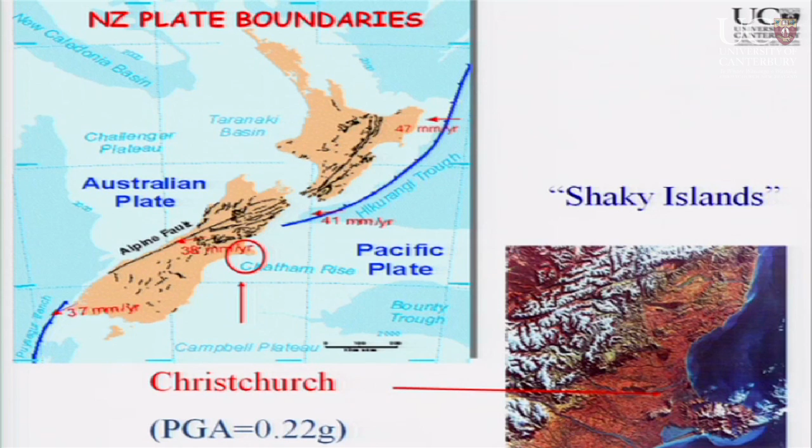Probably you were here, you didn't know it, but look at these scars - there are quite a few of them. And if you were able to see the number of earthquakes happening in New Zealand in the last few decades, you will see a lot of activity over here, quite a bit over there, and all the way around the Alpine fault and the scars around it, plenty of activity.

Unfortunately, this is something you now know by heart, and you'll almost be able to guess where the next fault is going to be, with probably equal probability of being lucky or unlucky as scientists. It's not true - but as you know, forecasting an earthquake is not predicting an earthquake. So being able to say there are unknown faults over here is actually the problem.

We do know that there are many unknown faults of the nature of the February ones. How many unknown faults are there, we don't know. And that's the problem. We should be able to design buildings in a way that, for how much we don't know, we can get through those unknown big ones - which is not only the Alpine fault - in a nice manner. You do know about September.

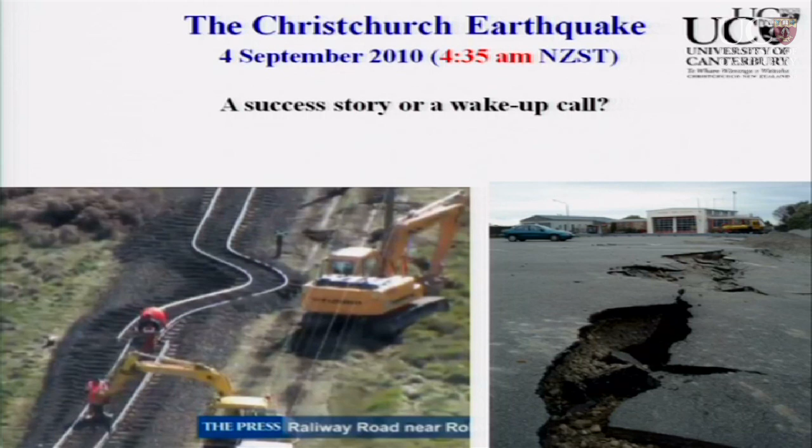You know that September was a lucky one, in a way, because it happened at 4:35 a.m. and not during lunchtime. September did not have the hundreds of victims it could have had. Because September happened, it did not cause the thousands of victims it could have, because it took down the potential - what we call the very well-known killers.

Unreinforced masonry buildings are well known to be potential killers, regardless, since quite a while - and we're going to discuss how long humankind has known that unreinforced masonry buildings are not the best possible buildings for seismic resistance. That's why they've been banned in New Zealand since 1935, after the 1931 earthquake in Napier.

So what we get out of this monstrosity, if you wish, is a humongous laboratory downtown - a very big laboratory that represents a big shaking table test, if you wish, with soil-structure interaction, soil conditions, liquefaction, full-scale testing, 3D, all degrees of freedom of motion. It's something unique.

That test cost quite a bit. They say $30 billion - it's not true, it's going to be more. You're going to hear that we are now writing a special issue with American friends and colleagues, and the special issue mentions $10 billion. I said...

How far away did people mention 10 billion? You know what the number is now - 30. Do you think that includes all indirect costs, business interruption, and your insurance? Has your insurance on your house gone down or up? Because mine has gone up, and my house, apart from some leaking and flooding in the roof, is quite okay.

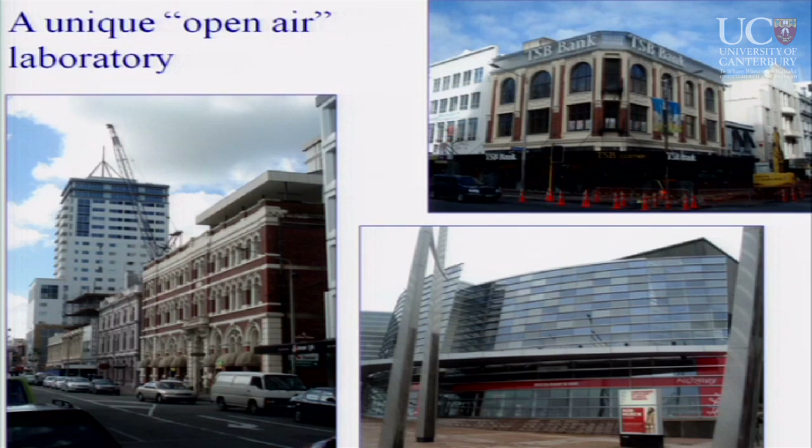Avoiding a facade to spall out, which is not a full collapse of a building, but is going to kill people, and unfortunately it did. Fixing that problem is not a major deal. We're going to see how that can be done, and how we can use new or old technology to

think about a better and safer city or nation. Now, the novelty, in a way the shocking surprise, was for the international community, not only nationally, to observe modern buildings, 1980s plus, quite recent buildings, damaged to an extent that they had to be retrofitted.

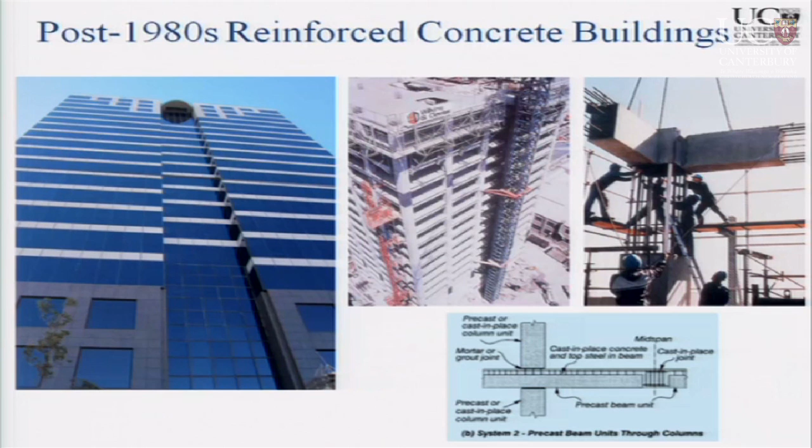You have not seen this one because it's not yet published, so now you can see it. This is PwC, there's no need to say more. PwC, after the earthquake, plenty of pictures like that. The ceilings are there, then we managed to enter the building when the ceilings were being taken off, so the whole building was completely naked. There was no carpet, no linings, only the windows at the far end.

You were in a building which, when it's empty, as you know, looks smaller. So you were able to see the whole thing and observe quite significant cracks here and there. The ceilings have been taken off, and you can see this level of damage.

We're going to discuss if that was good or bad, but the reaction is about how bad that damage was in terms of requirements to demolish the building. Actually, the building did very well. The problem is that it did very well because it was designed according to the standard way of doing things, which is that the building is going to preserve lives. It's not going to preserve itself from being damaged.

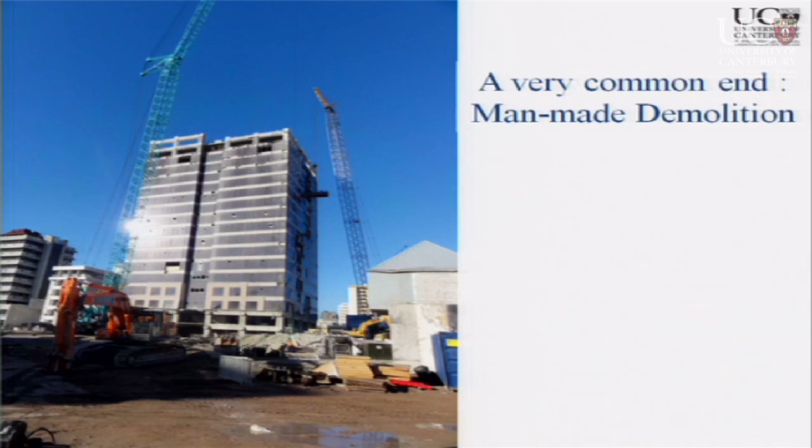When I showed it to the international community, they were thinking, really? We didn't know about that. I said, okay, look at that. This is not Dubai, okay? It scaringly looks like a desert area where some people are trying to build up a city.

I was trying to explain that the number of cranes in town were probably more, for a few months, than in a big new city coming up in a desert area. But instead of building up, they were taking down. In a while we're going to have a desert area where slowly things are going to grow up again. But it's not going to take a couple of years, probably not even 5 years. It's going to take quite a while.

If you have an idea that there are approximately, at least in the CBD, 1,400 buildings being taken down, how many buildings do you think can be built in New Zealand with the current capacity per month? Just make a calculation.

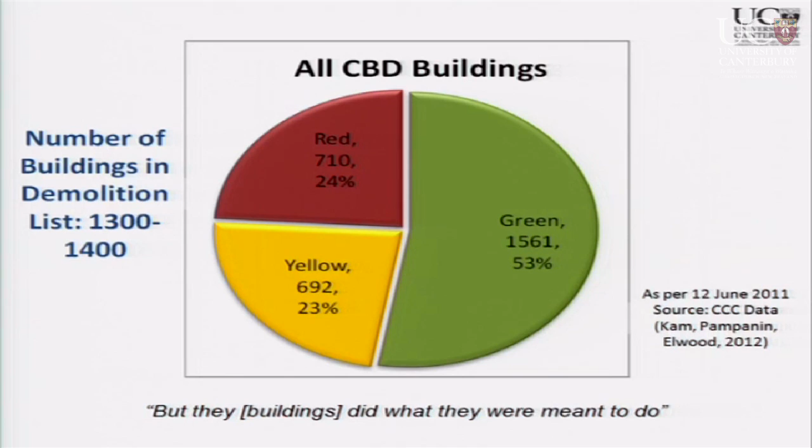I hope I will be able to see something, and not only my son, but my grandson, going to be able to see the full city flourishing. But there is a possibility to make it happen if there is a plan, which doesn't sound good, right? A plan for making all of this happen has been provided, we're going to see it at the end. So far this is the bad news, but like a typical good end movie, we're going to show the bad news, the mechanics behind it, and then try to give some hope.

Now, why did those types of buildings have to be taken down? The current design philosophy in earthquake engineering is based on what we call the new philosophy from the 60s, new when compared to the previous approach, which was to take the building and consider it as a structural system like a chain.

Within the building, you have weak points. My weak points are my ankles, I broke them a few times, I already know it. You can have a knee, you can have something. You do know that the weak points are the connections, don't you? It's much harder to break the leg, though it can happen, than to break the connection, the hip and the connection.

Same thing in a building: the connection between a beam and a column, the column and the floor, all the possible connections are the weakest point. Now, if we could make that weak point not brittle but ductile, able to stretch, open, move and rotate, then we are creating a ductile system.

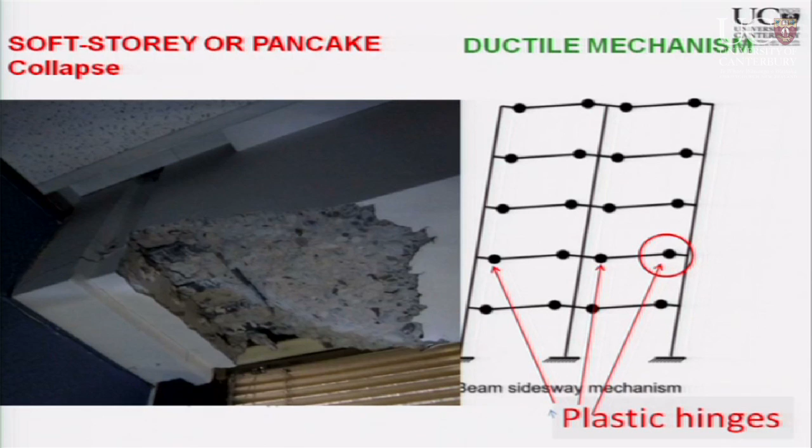Now, initially, I thought that was quite bad as an outcome. At the end of the day, let me go back, you start thinking, hold on, you know the frame now, I have a picture of it, you know about the frame. Because, on a positive note, since many of these buildings came down, now you can actually have urban planning again.

If we had to live with many mushrooms in the middle of nowhere, it would have been more complicated to design a new city. So let's try to look at the positive news. I don't know if I'm able to convince you, but maybe now we have the opportunity to go for big urban planning, and this time over, the insurance paid the most.

From now on, it's going to be a much different story. The premium is going to be skyrocketing, the excess is going to be humongous. In fact, there have been cases where a new building owner would have to pay up to 20% of the cost of the building as an excess. So you start wondering, is that worth being insured, or can I negotiate a better deal with the insurance? What can I offer the insurers to negotiate that?

And that's the discussion we're going to have today.

So that was the great change in earthquake engineering to avoid many buildings collapsing. Sometimes people compare this with Haiti and other countries that are not as developed as New Zealand in terms of earthquake engineering. They had all these types of buildings, that's why thousands, tens of thousands, hundreds of thousands of victims happened. New Zealand is in a much better situation, being a younger country, because earthquake engineering was up to very high levels from the beginning.

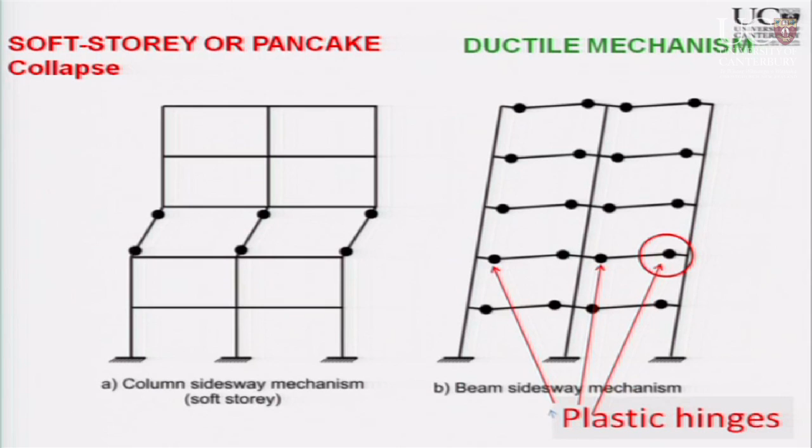of the 1900s. Napier, unfortunately, helped - and that's what happened. You get a disaster, you learn from it.

But were we surprised to see something like that? Absolutely not. This is computer modeling, a very sophisticated one - it takes a week and 7 or 9 powerful computers to run. Hopefully it's going to run.

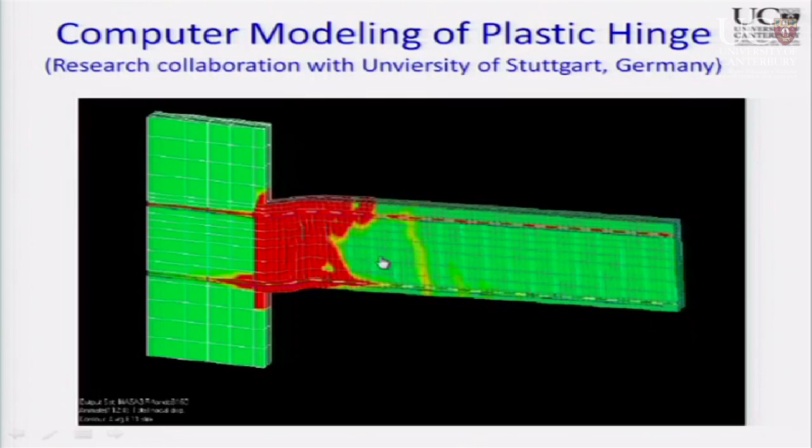There's a beam column connection, the same thing. We are able today - 10 years ago it was not possible - to model that type of damage that we would have as a sacrificial fuse in a building.

And that's what we are trying to do now, to apply to PwC and Grand Chancellor, to see if we were able to predict how many aftershocks it would have taken, the repairing situation, and to look at the repairing techniques.

Now, explaining this in simple terms: if you want to do capacity design, and you want to be sure that the arms are breaking, not the legs, then you make the legs stronger than the arms. If you do it the other way around, that's very dangerous. That was the pre-70 way.

This is now the post-70 way, and we are now finding that's not enough. We thought - the international community - in the 1990s that pre-70 buildings were found to be vulnerable. Now, in 2010, we are discovering that pre-95 buildings are vulnerable.

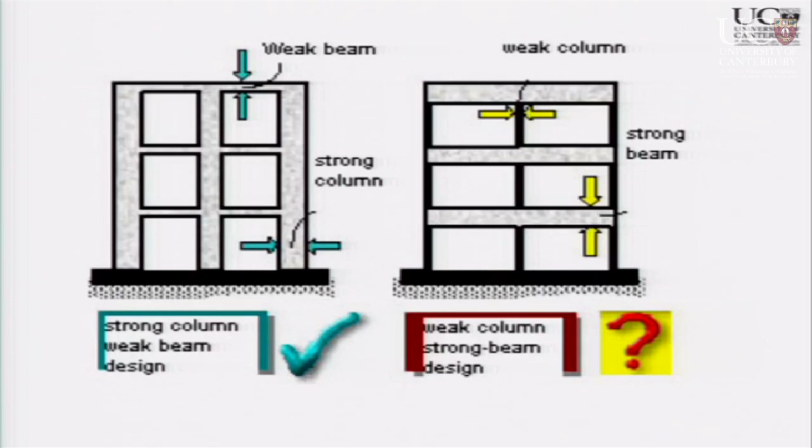In 2030, 2050, people are going to look back at us and think, why were they still designing those things in 2010, which were not yet completely separated from the ground - and we're going to go there. So the evolution of technology is such that what we do today should be the best of what we know, yet might not be the best in 20 years' time.

I want to skip this fast since you've seen it. The earthquake intensity necessarily causes more and more damage. Fully operational - you're able to use the building right away. Operational - just a few hours or days, you're able to enter. Life safety - the building is basically very damaged, but you're able to escape. Near collapse - life safety is not there, you're not protected, the building is partially collapsed and so forth.

Now, what does it mean? The green tag - if you have a small earthquake happening every 43 years - now everything is upside down in Canterbury, in Christchurch. Every 6 months we get something bigger than that. So this is telling the international world what's going on.

See, this sort of experimental test - it was something that might work for the whole world, but then when you go locally, you have to calibrate and adjust to local conditions.

The local condition of the seismicity in Christchurch is that the Alpine fault is still waiting. We haven't done anything to the Alpine fault. The energy that's been released, we've been told, has nothing to do with the Alpine fault. It's still going to wait to strike. So don't go home and tell someone we're now safe because the big one has happened twice, three times - September, December, February, June, December, and again, we don't remember. The Alpine fault is still there. It's going to be the big one.

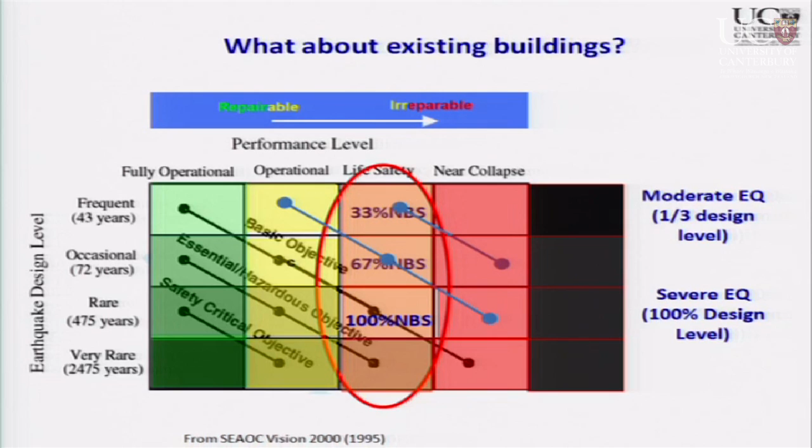So isn't it true that we could have an incentive from the government, as a country, like we decided for insulation, or for taking away fireplaces in favor of heat pumps? If you knew how much it would cost and how much the premium rebate would be to implement something like that, you would right away say, I want to cast my vote for someone who presents that type of plan.

Of course, we're in a free country, so you can do what you want. I'm just providing suggestions. Now, is this the best we can do in the third millennium? The answer is obviously not.

People often talk about new technology, but I don't really like that term, because it makes it seem like we woke up one morning and had this brilliant idea. But it's déjà vu - 3,000 years ago people had the same brilliant idea. Now every 30 years or so, research cycles back with these same brilliant ideas, reinventing the wheel and improving it.

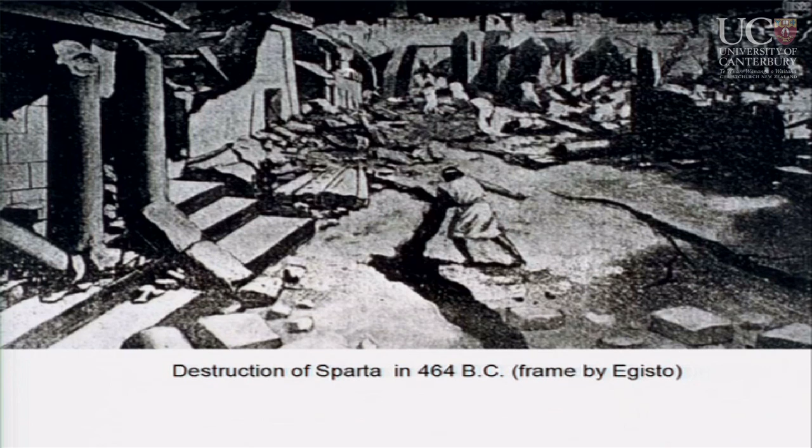So if we look back at what our ancestors were doing - we did not invent earthquakes, right? In Greece, for example, they had to deal with earthquakes for a long time, and they had a lot of trouble with that. So, whether you call it engineering or trial and error, they had to find a way to survive earthquakes.

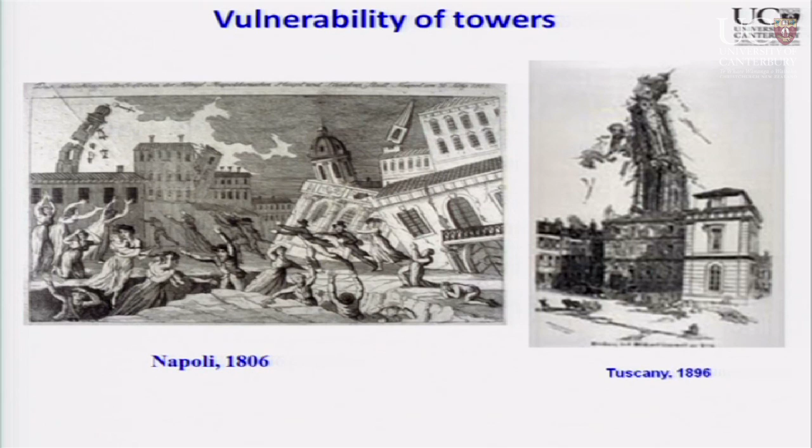Liquefaction - I've shown this picture to some of you - in a dramatic manner, this big rupture of the soil, big shaking, towers falling apart at mid-height, ring a bell. This has happened in different situations for a while.

The Romans were doing this too - I'll go back to the Greeks first, then they went into Magna Graecia in southern Italy, and passed the knowledge on. They used marble blocks, as you've seen. They did not have steel, energy dissipation devices, viscous dampers, or shape memory alloys - all the fancy things we use today. They just had blocks that look like concrete - a bit more precious, but essentially blocks of very strong concrete.

The way these blocks worked under an earthquake: the temple itself provided the mass, which is bad because mass drives the force, but the weight also stabilizes the marble blocks. Try having marble blocks without something on top - they'd be very loose. If you clamp it, it becomes much stronger. So they found their own way, called rocking, moving between one block and another, to carry the building through earthquakes. And they improved it.

How did they improve it? If you take a cross-section through different sites in Greece, including the Acropolis - these are fake reproductions restoring the Parthenon, using blocks that aren't original but try to represent the geometry and mechanical properties. But these are real, from Delphi and from Olympia, and these from the ancient Agora in Athens.

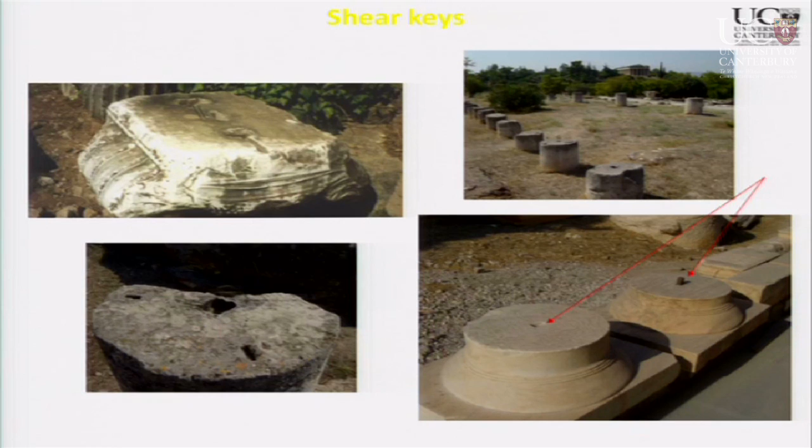And shear keys, which work to allow that rocking, not letting it fly around or slide around, but keeping it in place. Remember lead in the center, and remember rocking. The temple is not standing anymore for many reasons—people have been robbing things, taking out the lead between the two world wars. These type of columns are not as safe as when the roof was on top. They are loose; they need something.

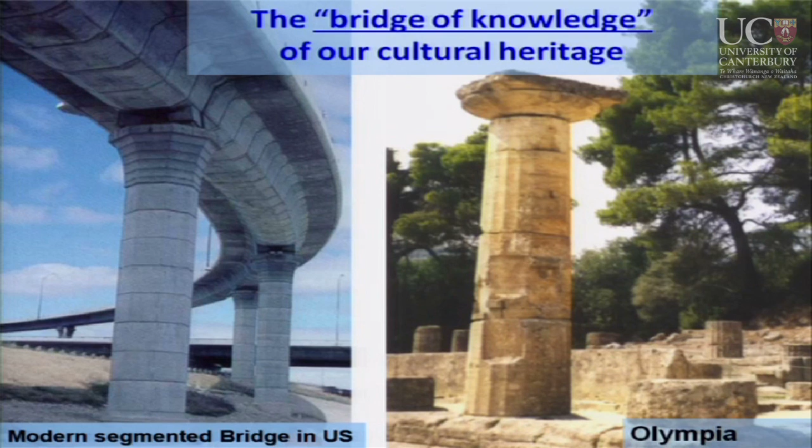Nowadays, this is Olympia, where the Olympics were created. Look at this beautiful segmental construction of marble with a capital on top. This is what we are doing now in bridge construction—segmental, in concrete, in the United States. We are basically copying, I like to call it the bridge of knowledge.

We are learning from what was done in the past. Something similar happened 2,500 years ago. They don't look as brilliant as Greek temples in a way, but this is the famous new technology you've been seeing in newspapers or in town. This is what we're pushing for, trying to explain to people that it's not so expensive.

Now, let's learn from the ancestors again. In the past, people were using something today we would call post-tensioning. Nowadays we have big strands, big rods, which pull together an element and give that clamping strength. In the past, people were using rubble—a very bad type of masonry, not a regular stone masonry. Look at this lignum, wooden beam.

Leonardo, end of 1400s, beginning of 1500s, was already talking about having a 3D behavior with ties in a building to resist earthquakes. I was trying to find the word tonight—it was absolutely fantastically written. He was talking about trying to have a box behavior, something compact. How do you do it? Ties. What happens if you don't tie? You fall out.

Did we need to wait for the Christchurch earthquake to know it? Do you remember? Probably you do, because I discovered it. In 1968 or the 1960s, in the council bylaws, it was already written that parapets should have been fixed. Did you know that? Did you see them being fixed in the last 50 years? After September, did you see them being fixed? Why not? It's too expensive—putting a timber post, like what happened in Riccarton. Unfortunately, after what happened on Riccarton Road, it would have been considered too expensive or just not appealing.

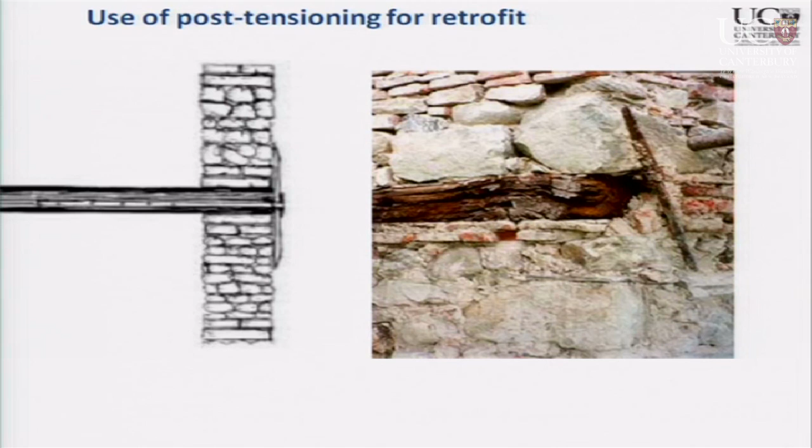Now, what they did to hold on was to use a tie—excuse me, this is typical of my class, I'm using the example of a belt. They used a chain, an iron chain, like a belt, with nothing else than a mechanism like that, to clamp the drum of the cathedral together. Fantastic. Later on we've used different materials, but this was already there 600 to 700 years ago. It's been used in my city, Pavia, on a facade—Pavia is not in a high seismic region at all compared to Christchurch, it's more like Auckland.

Nothing worse than that. And in Pavia, because it's like Auckland, you tend to have all of these things, not only in heritage buildings, but also in normal houses made of masonry and timber floors. This has been then painted, but you see this sort of anchorage? Now, in town, you would remember that in the Art Center, there are fantastic examples of good things like that.

And when those fantastic examples were not there, things happened. When they were there could have been two options. One was the building survived, the fabric was too strong, and so yet the facade had that - if you don't have a complete tying, then where you tie, you're staying, where you don't tie, you pull out. Fair enough. But there are examples of exceptional good behavior.

And how much do you think such a tie would cost? In terms of how many heat pumps? I'm serious, in a house, 1-story, 2-story house. Less, 1.5. 1.5 heat pump will give you - if your engineer is going to tell you more, or contractor, I'm going to chase him down, you tell me. So a few thousand dollars, $3,000 to $5,000, is going to give you enough tie to avoid the worst.

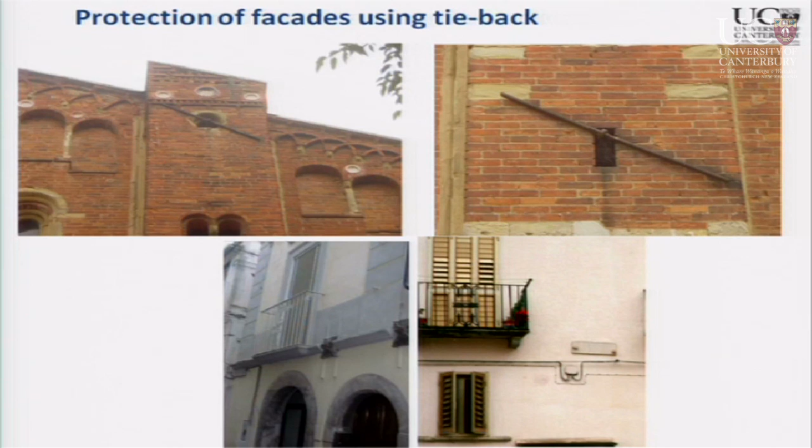And that's, I think, it would be the mandatory requirement, like the famous double glazing or minimum insulation requirement that we should be asking the country to fix. From there on, fair enough, after you fix the whole thing, then at a minimum level, then fair enough. Then if you want to have the extra, you pay for it. Okay, I take it. But the minimum should be there no matter what.

Now, what is the fancy stuff? Instead of having an iron tie and an iron chain, you can actually have something which is called shape memory alloys. This basilica is St. Francis in Assisi. In 1997, there was a big earthquake. I don't know if you've seen, again, I was trying to find the video. Unfortunately, a bad story - the basilica was very badly damaged.

The dome, the drum, part of that collapsed. Then engineers were inside the day after, something within 24 hours. An aftershock happened, and I don't recall if it was 2 people or 1 got killed. And there is this cameraman taking the collapse and the big cloud of dust coming towards him. He just stayed there to try to see what was going on.

And anyway, that basilica has been fixed by using complex but available technology, including a tie back, not with iron, but these are shape memory alloys, which are new things that are changing their chemical content. It's something amazing - the first time, 20 years ago, when I heard about it, it was unbelievable. And then the cost went down, because that's part of the cost of progress.

So these guys are capable, they're rods, but they're not timber wooden rods, or steel rods. After being stretched, they remember where they are, they come back - not because they are elastic, they dissipate and they come back. It's something quite interesting. So what happens, imagine, the masonry tends to move during the earthquake.

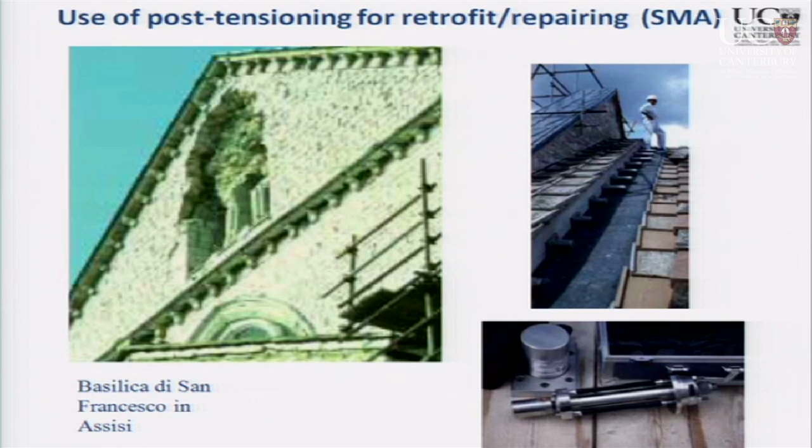You don't want to hold it too tight in a point, otherwise it's going to break through. You want to have a little bit of a nice and soft jacket, which is uniformly holding on it, right? Uniformly, otherwise it's falling in different places. So what they were doing is to have a multiple number of them creating a capillary restraint which is not stiff, but is able to let it move a bit, but not too much. These are the basics using new technology of these type of things.

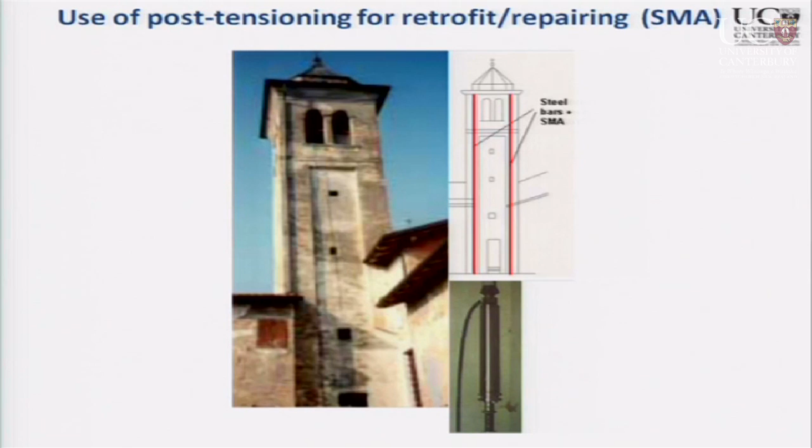Now, look at this bell tower, which could have been chopped like here. The way of avoiding being chopped, used for centuries, is to try not to stiffen up that region, otherwise you actually have a bigger problem, but to try to tie down the top part with the bottom part, which is using, again, bars, clamped, using the Greek temple approach. A little bit, not too much, is going to hold it. When it's going to try to move and shear off, something is going to pull it back.

Now, we are going today - this is the lessons from our ancestors. Do we need to reinvent the wheel? You know about this, what is this? Women's Hospital. You know what this technology is? Base isolation. You know how many buildings are in South Island base isolated? Really? How comes? Are you sure?

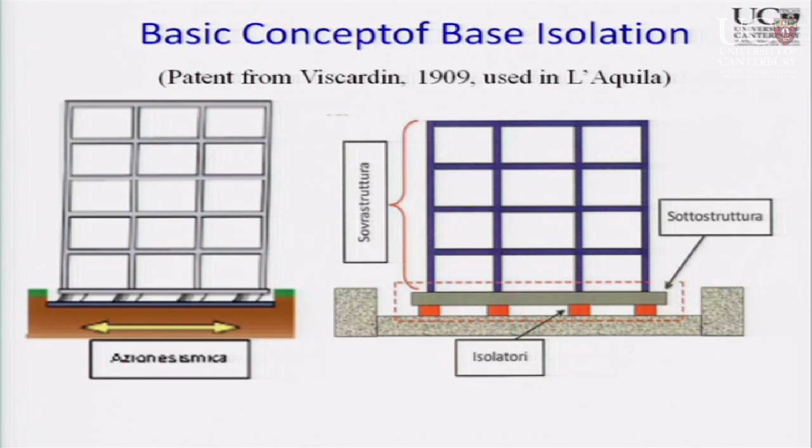It's going to happen, you can bet. It is going to happen, because if we have it in our brain, it means we've seen it in the past. And I'm going to show you.

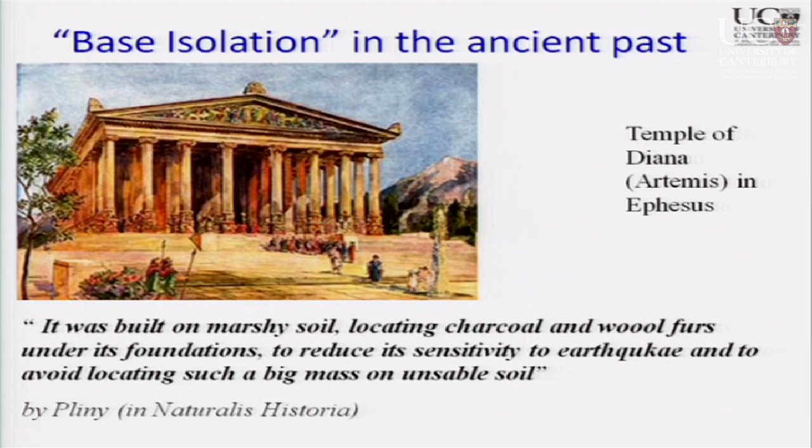And then later on, things have been happening. I have to give you some bad news: base isolation, modern base isolation, was actually invented in the past by the Greeks and so forth. They did not have a patenting system, so they couldn't protect it—for 2,000 years everyone was able to use it for free. Then we do tend to say that modern base isolation was invented in New Zealand. Almost.

I'm sorry. But credit to New Zealand. I'm a proud Kiwi Italian.

This was happening as a slider after big earthquakes, which were happening in southern Italy in the 1800s and the early 1900s in San Francisco. So people started thinking we need to do something better, completely different. That's where the best brains got together for a while trying to get something new. It did not have a successful implementation in terms of device. So the credit really goes to Bill Robinson of New Zealand, who created a device that people everywhere around the world manage to use.

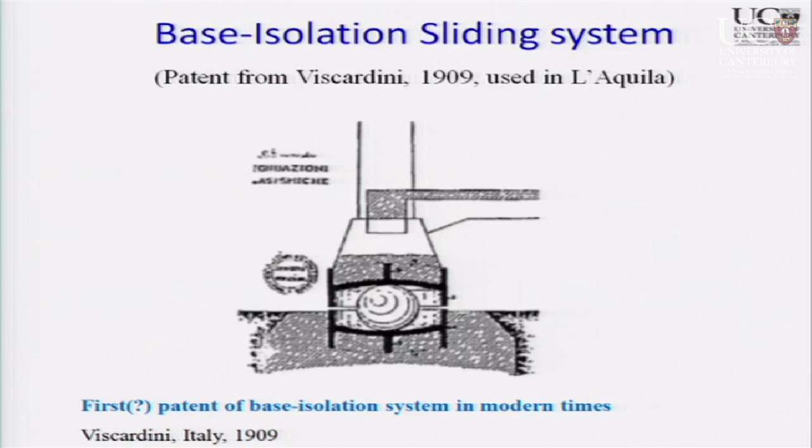But just look at this device. You're going to see what's happening now. So you know about lead rubber bearing, don't you?

Lead rubber bearing is a way to isolate your building from the ground by using rubber, which is soft, layered with steel lamination, and lead. Where have you seen the lead? In the center. The lead in the center, while moving, is able to give you dissipation. The rubber and steel together give you strength and stiffness, and at the same time flexibility, because you need to be able to move. All together, this became the great invention of one type of isolator.

Now I'm going to show you a couple of tests coming from Bill Robinson. I have to remember which one goes first.

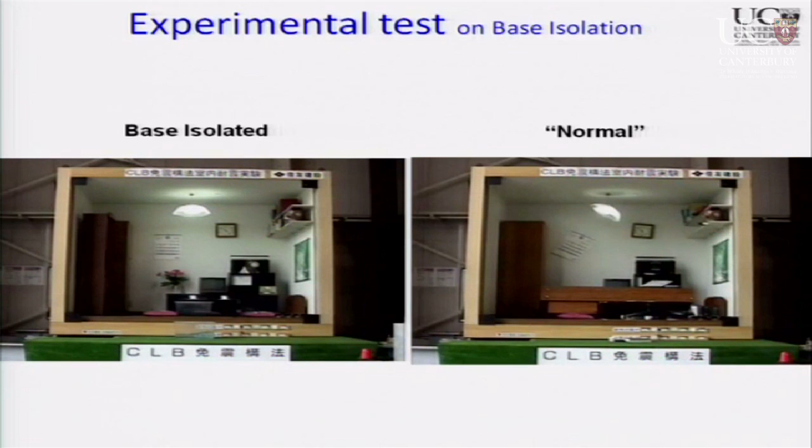Ideally, the isolation should basically be a slider. If you put your building on skates like ice skating, that building would possibly be pushed a little bit because of friction and then probably go too far away. That's why lead rubber bearing, which gives that energy release or energy consumption, works before going there.

Now, I know that you don't believe us, so we're going to have a much better experimental test. That's a fake one, that's a good one. So today we designed the cheap base isolation system, and obviously this is already a rocking system, otherwise we won't be able to reproduce the test too many times. So I'm already showing you the next generation of system, which is non-damageable, with dissipation on the top.

Now, you know that the earthquake doesn't come with one frequency. The earthquake comes with a combination of frequencies, think about a series of waves in the sea, many waves. Some are very long, some are very short, and some are very fast. They're all together, that's what makes a mess. But you could actually look at the sea waves and take away the ones coming slowly. So similarly, the earthquake has a lot of frequencies inside.

If it tends to hit, look at this, for example, not a big motion. Why? Because there's an amplitude, but the frequency is not the one of the building. If you hit the frequency of the building, you get resonance, right? So if the earthquake happens to have that frequency as a big content, you start being in trouble. Now what's happening on this building is that it's not getting damaged because it's made of these rocking systems, which are undamageable.

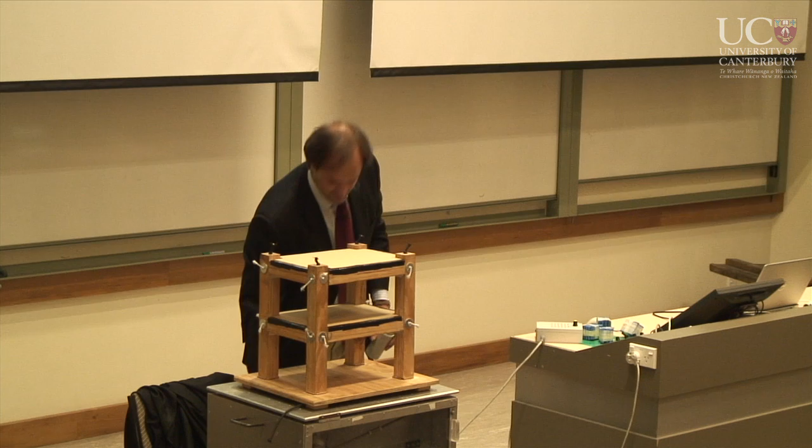Why? I'm going to explain why. Now hopefully that was the biggest shaking that the building was feeling, right? It was the one in resonance. Yeah, if it doesn't work, it's going to be embarrassing.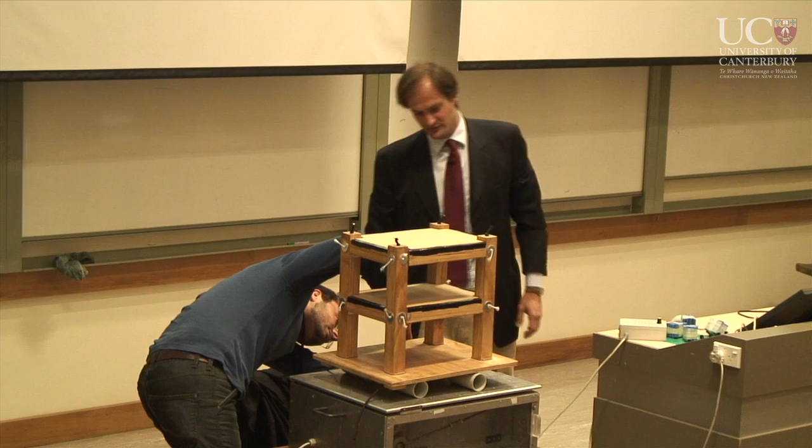I spent yesterday, I went to pick up my students, saying I need some help. But then I enjoyed so much doing it, I went to start doing things, it was so much fun. So if it doesn't work, we're going to redo it.

Look at that. Happy? I stop it because... Now, just imagine that. And obviously I can play with the frequency, try to see if I can make it into trouble.

Look at that. Now we are going to discuss how much does it cost. And you can bet that New Zealand is going to be the one using all of that. There are different ways of doing it, and we wanted to play around.

You remember lead rubber bearing? Look at these fantastic things. You can use, you can't use, you can use engineering solutions coming from the tires of your car. Engineer solutions, don't try to do it yourself.

But we are really looking at, okay, now I want to show them on purpose. There are two options, it has to be designed. We tried like that, and then we said no, it's too stiff. Now we're going to put it in the stiff way, it's stiff, and this, because it's taller, is softer, okay?

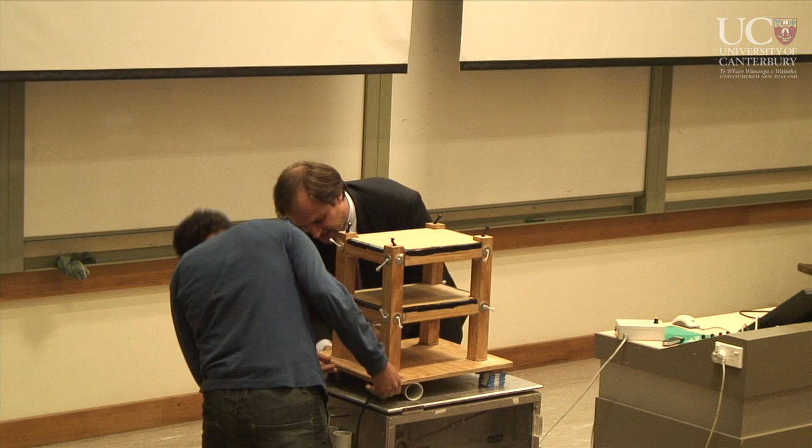So just to check the design. If the design is not done properly, and of course we did not do numbers, that's the trial and error thing. We did it, it was working, but we were not so happy. How's that?

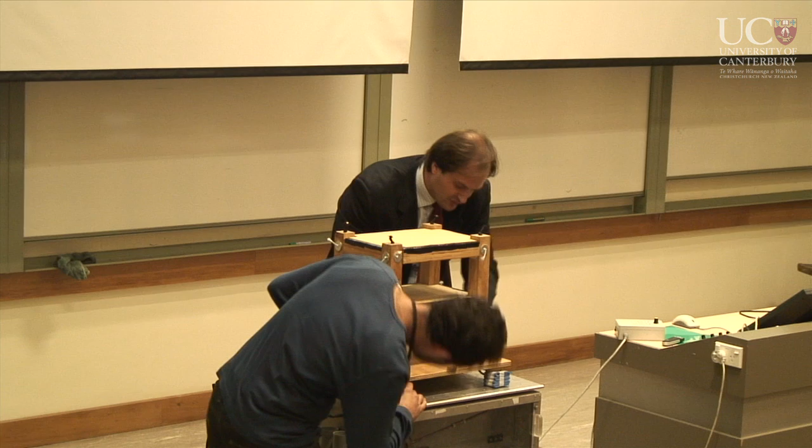Okay, hold on, we can do better. Now, if we make it softer, because you design the stiffness of it, you have to design it, okay, to just work properly. Now we make it softer, so we put it higher. It's a softer type of rubber, if you wish. There's no lead inside, but to make it fall.

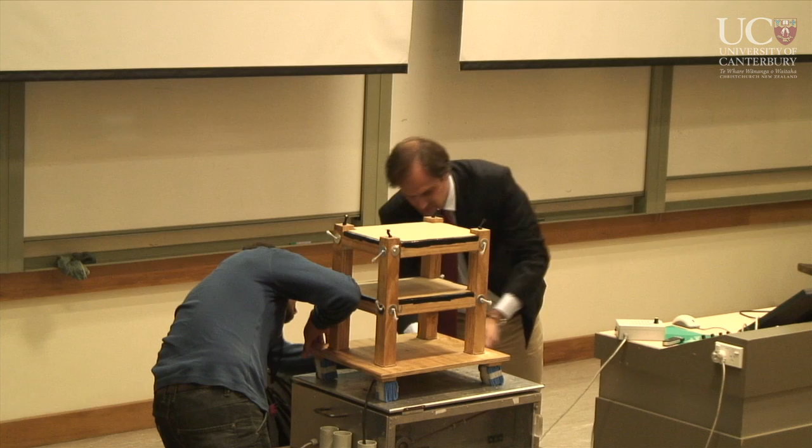Okay, try, go. It's already stable over there. It's a bit unstable here. It's working much better, okay? So the point will be, how can we make this obvious solution working, working, without spending too much money.

Now, in my slide here, I want to show you something which is, we have done the experimental test. This is a very expensive one, as you can see. That's what New Zealand, take it, stay there with me. What you think we can afford, this is something that has been done by B. Robinson on a better scale. Let me just show you here, if I can.

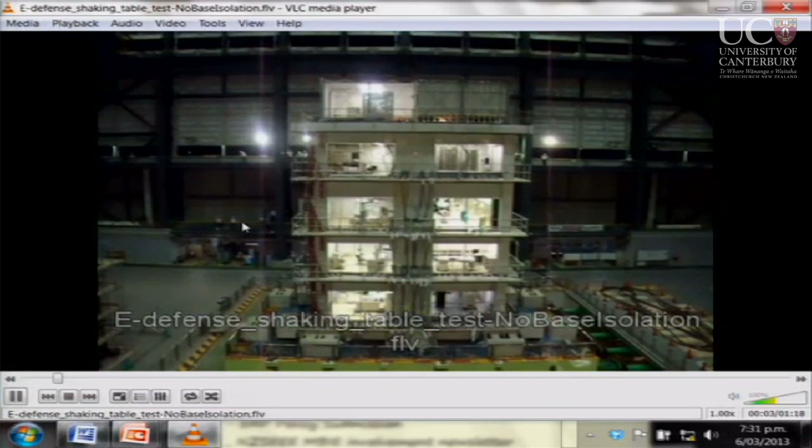Type of damage, because the building is still there and there was not an acceleration. Do you have an idea of what are the acceleration in a building? They're growing with the height that you can go to. Now, the earthquake was designed in the code, was meant to be 0.2 G. I'm 100 kg, I should have felt on the ground 20 kilos in this direction. That was supposed to be the earthquake. But the earthquake decided to go for 0.6, 0.8 G, okay?

Now, you move up in the height, you might reach 2 Gs or 3 Gs, which means that suddenly I have to hold 300 kilos smashing me against one side and smashing me against the other. Or having, there are examples on the shaking table in Japan, basically big cabinets flying at high speed, tens of kilos they are working on, just imagine the detailing, a copy machine. A copy machine coming against you at that speed can basically kill people. Okay, just to tell you the thing.

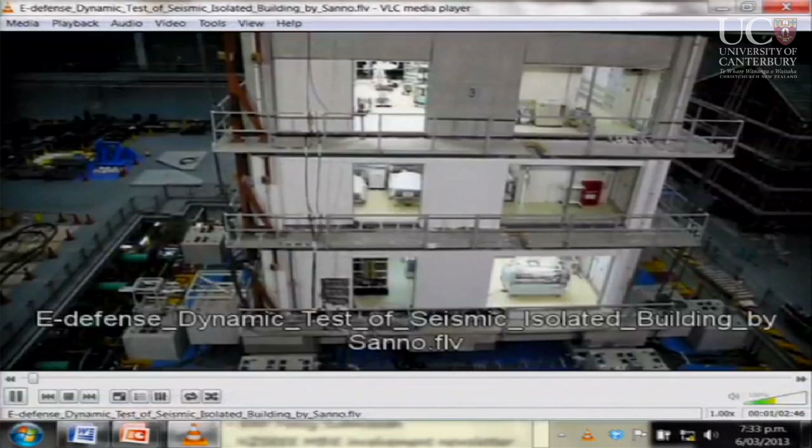So there are advantages of doing this base isolation system. We can see a little bit here. Let me try to give you now an example of what happens if you do use there, it is, it's already going. So just check the movement over here. And basically, that's it, it's rolling around.

Has to be, you remember that? Approximately, instead of being moving, it is now isolated. The best, again, in the future would be something which is coming over, a little bit magnetic field lifting up, the earth is finishing coming down. Okay, we are trying to go there, and right now it's not that far away.

Now I'm going to fly through, because you're getting tired. I have to find my presentation back. There it is.

Okay, now, how can we make it cheaper? Because the whole thing is, we understand it is the best way, or one of the best ways so far. There are better, they can be improved, but the basic base-isolated approach can be improved in terms of cost, and it has been proven in the restoration of temporary accommodation, which is never going to be temporary, for 18,000 people after the earthquake in L'Aquila in 2009. The base isolation can be cheaper if you use, basically, so obvious once you see it, the foundation, the basement for something, car parking.

Someone is making a lot of money on car parking, don't they? If you can have your car parking, you need a basement, you need a raft foundation, or you go down with 25 meters of piles, and you need the basement foundation no matter what. So why don't you use the basement foundation for car parking? Naturally, you need to have columns, so the only cost will be the cost of inserting that element. That's it. Compared to what?

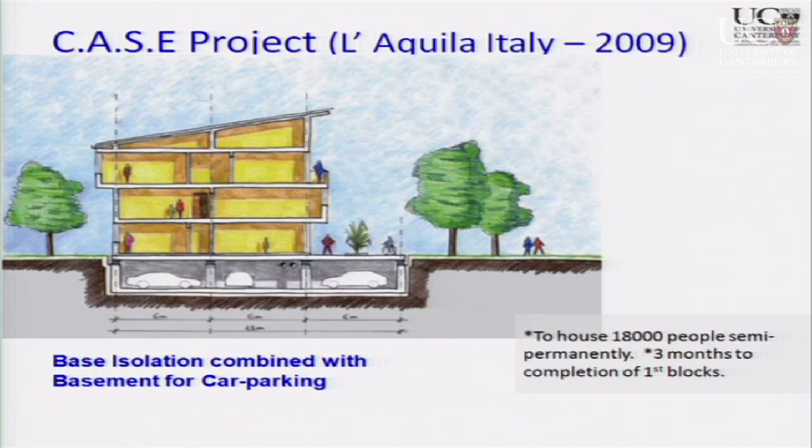So there's not really a trade-off, and that has been proven using what? The Italian patent, not anymore a patent, which is a slider. Okay, you can use lead rubber bearing, or you can use a slider. What is the way of avoiding the slider to just fly through?

Look at that concave curve. Basically, you're trying to move, and you're using the weight to slow down your building. When it's going up, the weight itself is trying to push you back, so it can't fly away. Obvious, right? Once you see it, of course it is.

It is a re-engineering version of the Greek temples, if you wish, which were on charcoal, and on the Viscardini concept of two concave around a cylinder, basically.

Now, why not a cylinder? Please be sure that you don't do that, because the earthquake will not come in one direction. We'll have two directions, plus the third one, and the third one is quite a critical one for base isolation systems. So you need basically not something like that, but something like a double cylinder, which becomes a sphere. Obvious. A sphere underneath your building, with something holding on a bit, is going to be the best isolation system that can be done.

Now, these are real stuff, rendering of apartment buildings. They costed, at the end of the day, not more than what a typical new building would have costed, because the value of the car parking underneath is a big one.

Now, people have been saying that base isolation costs a lot because you have to leave a gap. Honestly, because you're losing half a square meter, or multiply by a lot, you can't sell that half a square meter. But you're going to make a 50% higher rents, and you don't pay the insurance premium at the same level.

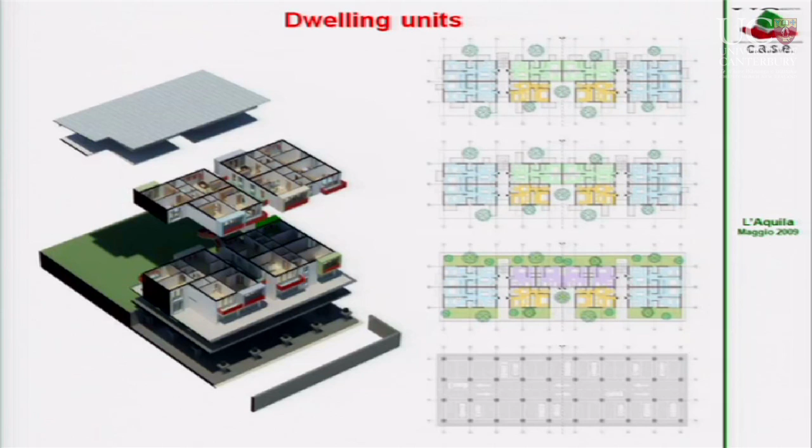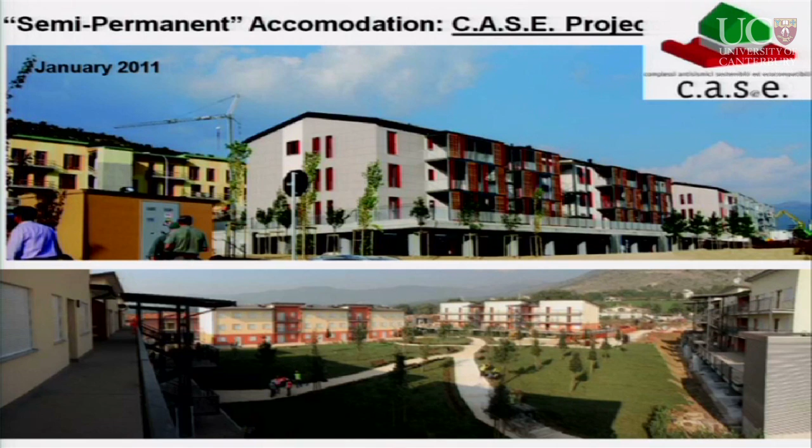So dwellings designed in any way, just to show you real stuff, these are coming on as nice sliders, and these are real villages, which were meant to be temporary housing, not bad. As a temporary housing, how much the cost? Equal to market cost. Done in between April and November, 6 months, 9 months, whatever it is, before Christmas time, because November in L'Aquila becomes a very cold time, okay? Now, let's move it.

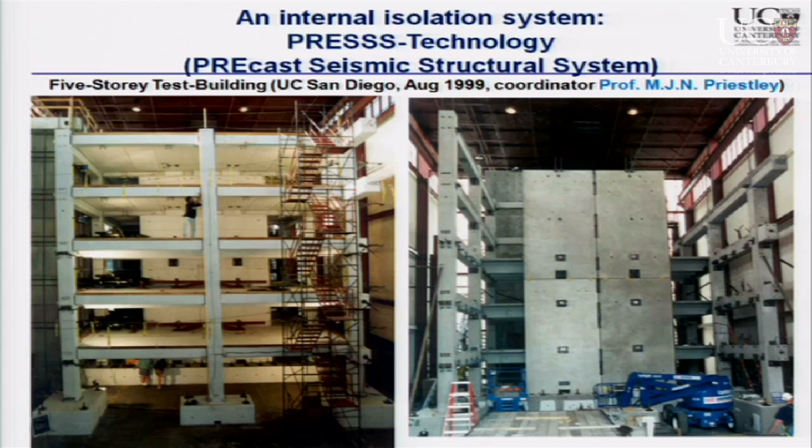I want to show the model rocking system. It's a type of isolation. It does not happen underneath, it happens inside. It's not giving you exactly the same level of performance, but is in a way less expensive. I want to go through all of that. Test the mechanism, goes back and forth, you've seen over there.

How does it work? Prefabrication, elements are precast, combined together by high-strength steel, the famous Pres-Lam wooden timber beam, which is now using a high-strength steel, nothing else. And because I tie together, this can become as strong as I want. But should the earthquake decide not to read the code again, I don't break it. I just go for the rocking. So it's stiff as much as it needs, and then it takes away the energy, by fusing. It's like, bah.

And this concept of bah has been used as you think about your air pump for your tire. This air pump can actually be used diagonally over here, holding on, release. Holding on, release. So there are many things that you can't just imagine being developed, and they don't cost too much because they're becoming simpler and simpler. If you think about a wall, and I need to go through, you can have the same. This is going to be more complicated because there should be a floor restraining it, okay? We agree on this.

It's too strong. A wall is definitely a very strong system, if I should be trying to untie it. Anyway, the concept is that you're trying to move it, and it's not breaking, it's just lifting.

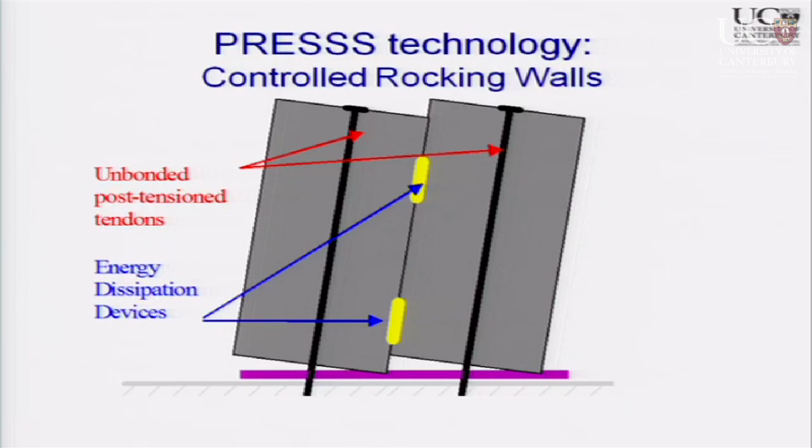If someone is pushing you back and forth, you put your legs far away, because if you stay like that, it's going to be quite unstable, okay? And you try to use as much as you can, and you're lifting up, and you're moving, you're being articulated, okay? So not any different from human body design.

Stay with me, all the way. You don't like it anymore, do you?

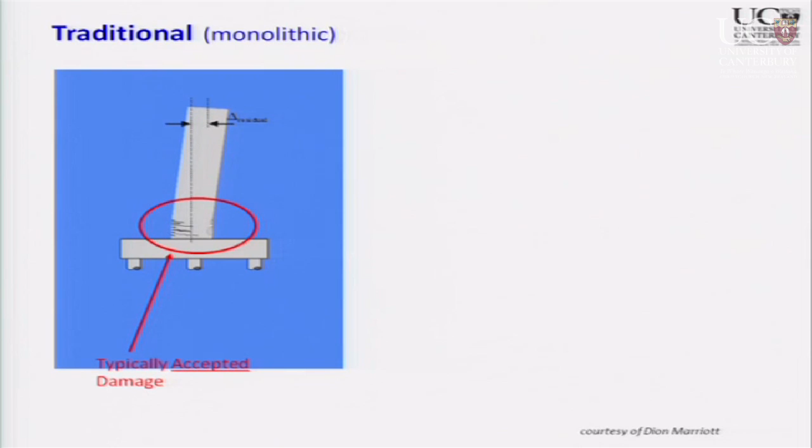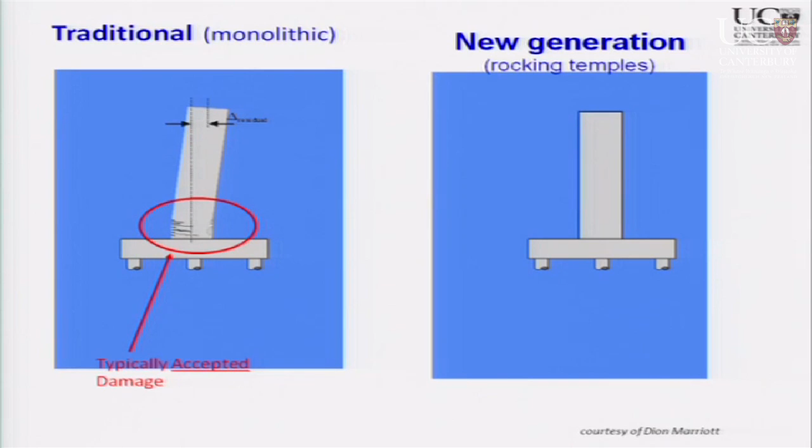Older way, which we call new, rocking temples. Not bad, so you can call it the older way. There are some people, and I am traditional, I study classical studies, so I prefer to call it the old good way, which is not the 19-something. That was great, but this is better. So the old good way, the really old good way, would be amazing.

So what are we doing next? We don't like to think that something is going back and forth, and then at the end of the day we have some steel elements sacrificing themselves and breaking up. So what we've been developing, and it's really something that we have done here, is you see these guys?

Look at how expensive they are. A piece of rebar, of reinforced concrete, you take it 12 meters, you chop it in, and you create a fuse, an electrical fuse. Then you insert it in a tube, a very expensive tube. And then you put some grout and very expensive sand, water and cement. You lock it in and you plug it in.

How much does it cost? Give me a number. A little bit more. Okay, that's it. We are in the range of, we've been looking at different solutions, which are going to be in different arrangements.

They cost between $20 and $100, okay? And you have to think about it, they are replacing the effort of someone, a workmanship. The cost per hour is going to go to the sky right now. So a human doing the caging of your steel and grouting the concrete around is still going to be expensive.

So these are becoming cheaper, and I don't like to, you know that I don't like 'cheaper' anymore. So in the broken English dictionary, cheap is not there anymore. We call it low expensive. So it's less expensive, and it's almost a no-brainer because it's the only element, a sacrificial fuse, that after an earthquake you would have to change.

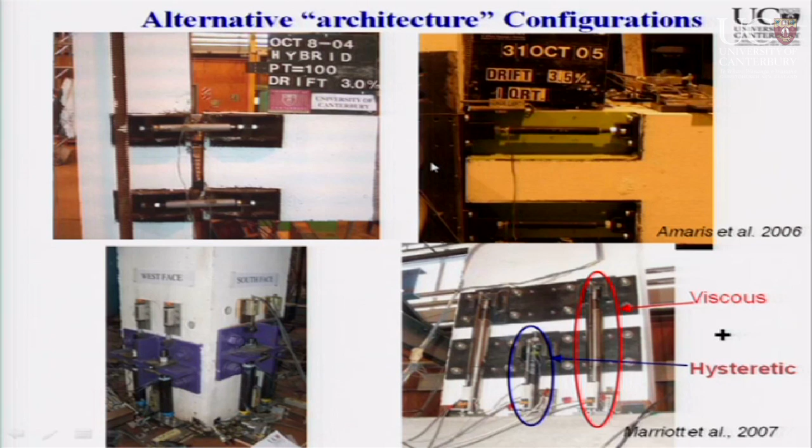Imagine that this can be accessible. You can actually have a panel that you can open up and change by yourself, with an engineer supervising you possibly.

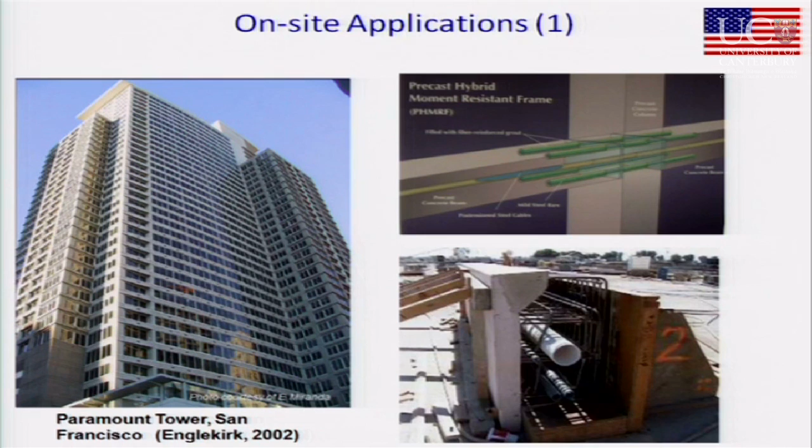From theory to practice. This technology, rocking of that nature, already happened. The tallest building using this technology is a 39-story building in San Francisco, not exactly a low seismic region.

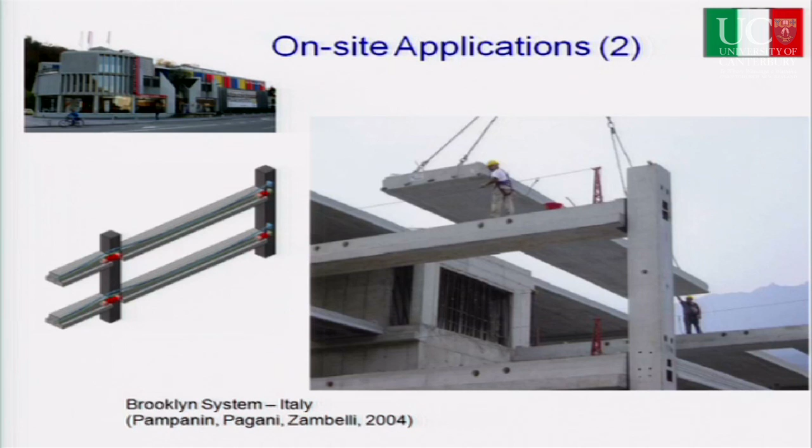I have to show Italy too. In Italy it's a delicate thing, because the type of concrete is cast in situ concrete. People are using prefabrication for industrial plants, not for this type of buildings.

Why is it happening? Only because it costs less. Let's be honest. It's fast, quality control, you get elements already prepared in the factory, so you can build very quickly, and someone is making a profit of it. The point is who? Not the engineer, not the architect. The owner, depends. If it's a development where someone has a contract for everything, they will see the advantage, but there are many advantages to it.

Argentina, Costa Rica are so advanced on this technology. New Zealand too, look at this. Luckily, it's not the end. New Zealand picked up, and we have pushed a lot for it.

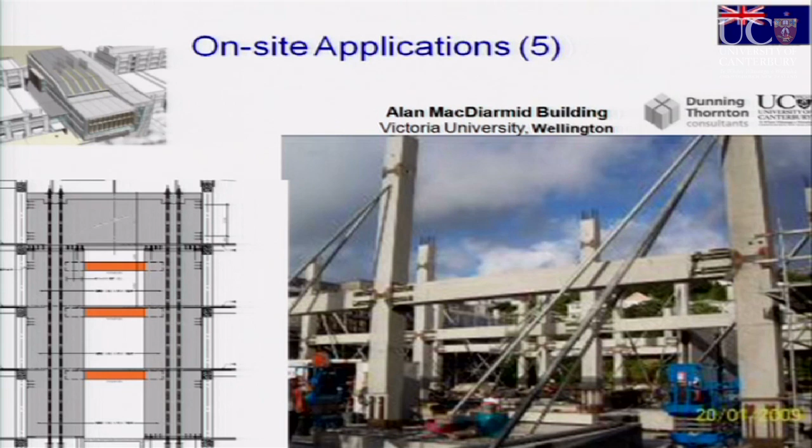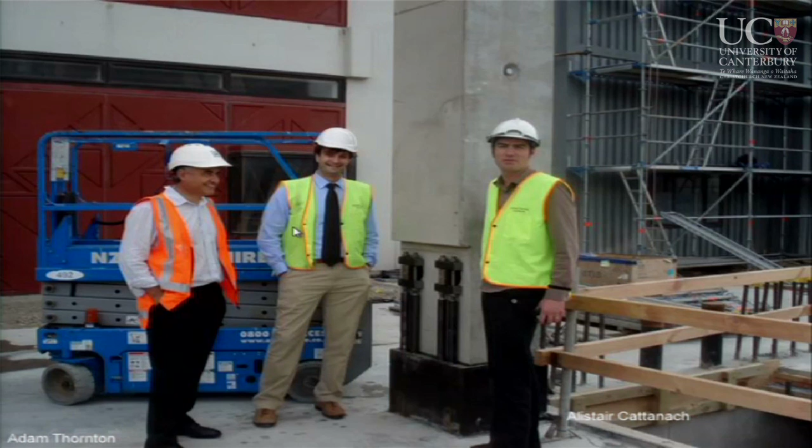In 2008, one of the most recent and best technologies features what we call plug and play. These are the plug and play elements, replaceable, in Wellington's Victoria University. They can be replaced, they can be painted - that's how they look when nicely painted. They become an architectural feature within the building. There's a cafe in Victoria University where people sit, and there's a video showing that feature. People feel safer.

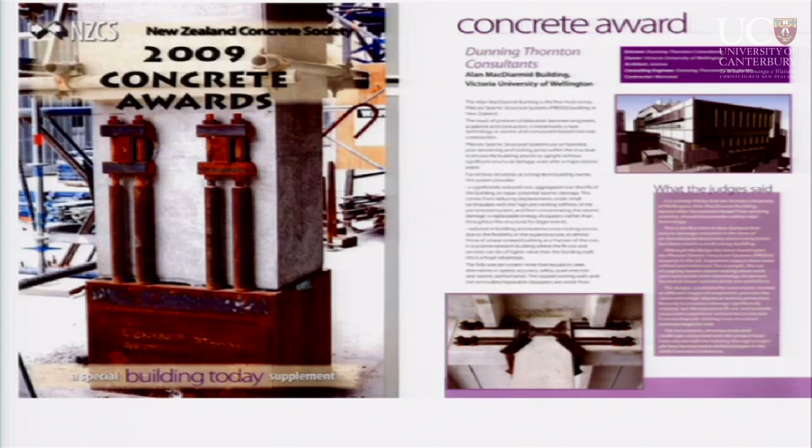At Caledonian Street, the Southern Cross Hospital endoscopy building uses this technology, that type of wall system. After the earthquake, it was used as an emergency building because it was operational - it could work right away with the theaters. The cost was slightly lower than the equivalent technology designed prior to the change. The client said clearly, fine with me if you want to change, it shouldn't cost a single penny more. Then after the earthquake, the client, Southern Cross, said, we take care of our patients, that's why we really pushed hard.

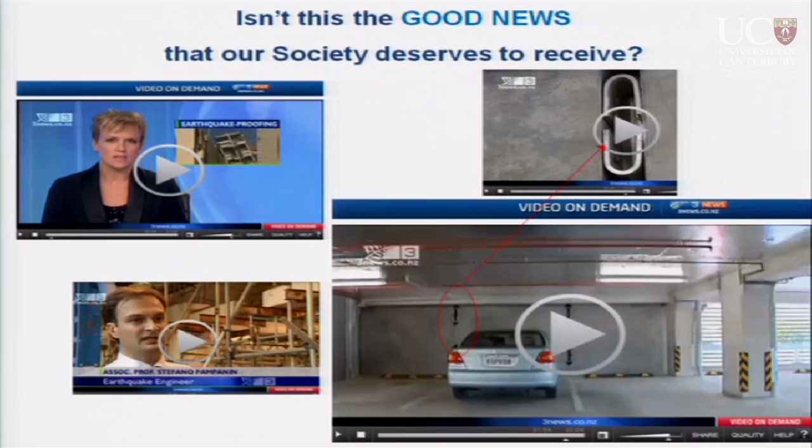The truth is always coming up. Everyone was happy and thinking, that's great, can we do it a different way, can we do it in timber?

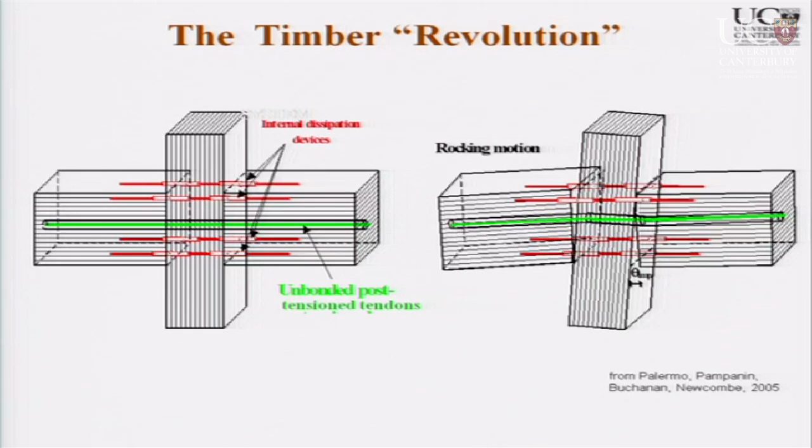Let's fly through - you've seen things in timber, how does it work? The revolution in timber is to basically do it the same way with engineered wood, a strong wood that is now available in New Zealand.

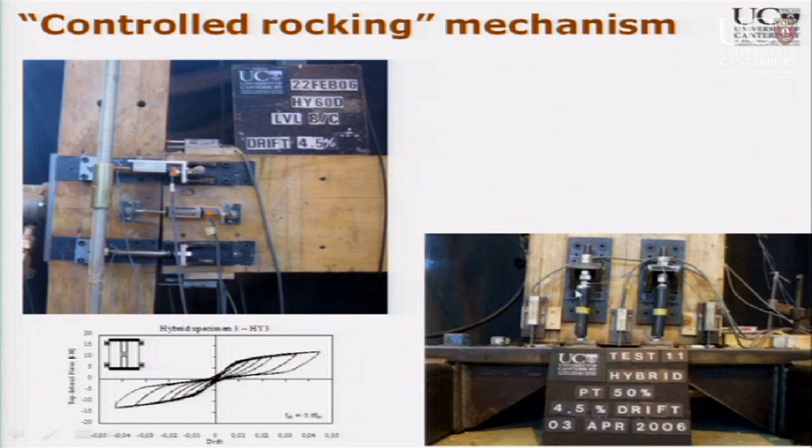On the left-hand side, that's the rocking in slow motion. On the right-hand side, you see it doesn't get damaged. Basically you have these fuses that are the only thing you might need to change after an earthquake, otherwise you don't. This is what we call pre-stressed laminated timber, or Pres-Lam. A big building was tested in the lab - we couldn't break it - so we made it into a building at the university.

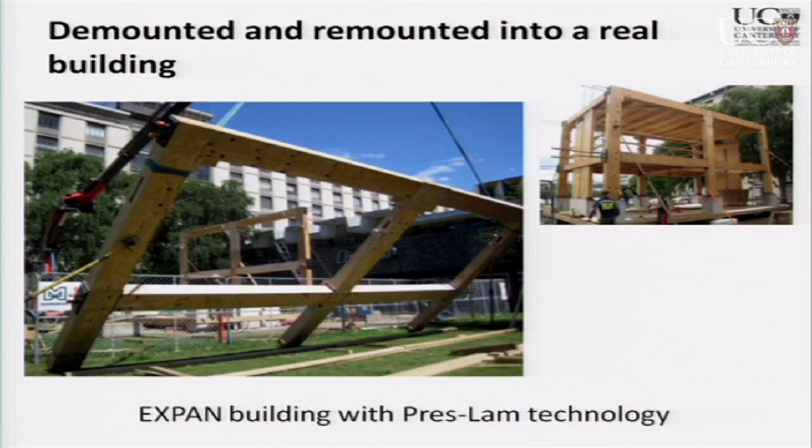That was the test video, which I won't show you. The building was moved from the laboratory to a different place within the university, a few hundred meters away, but you have to unpack, repack, create a new foundation - and this building went through the earthquakes in February and June and so forth. That's the CEO of the company sponsoring it.

You've seen this, I hope? You haven't? No? Oh, you must see it. Sorry, guys.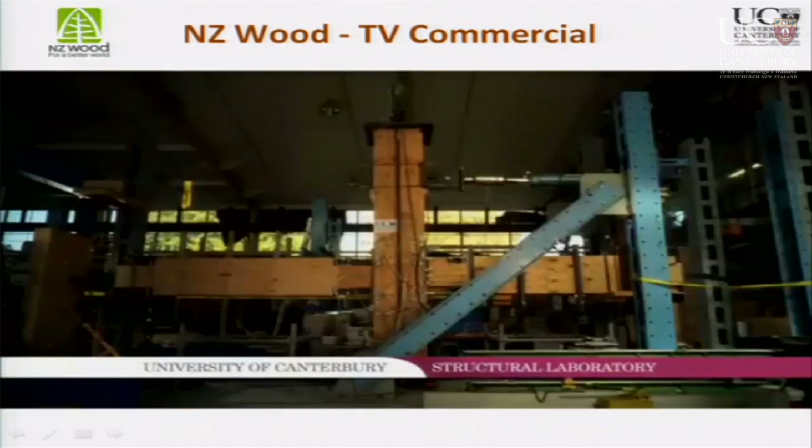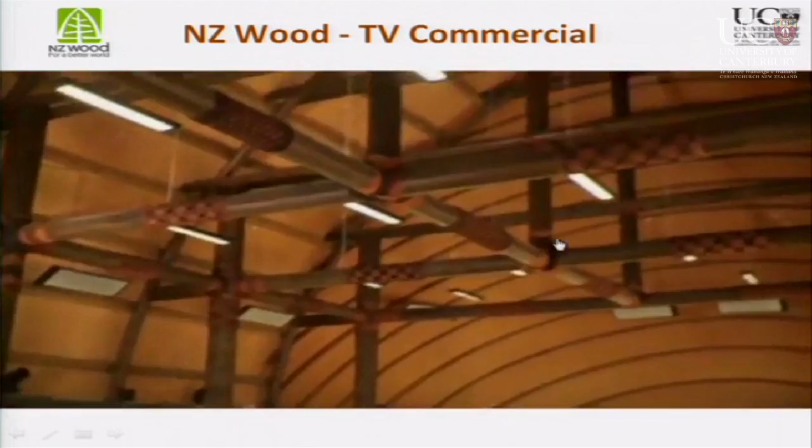You're trying to keep things under control. They go off control when the media are involved, but that was great. And that was before the earthquake, well before the earthquake. So things were already happening at that time. From theory to practice, let's fly through buildings now using this technology at NMIT Nelson, Nelson Marlborough Institute of Technology. Before the earthquake, in 2008, this was the first building in the world using a University of Canterbury created Kiwi technology.

So, all of that - timber, University of Canterbury spin-off company, for which we make no money, just so you're wondering, because we had the brilliant idea of being convinced to give it for the famous $1, which I still have yet to see, for use in New Zealand and Australia for free. Because of that, there are buildings going up in Nelson.

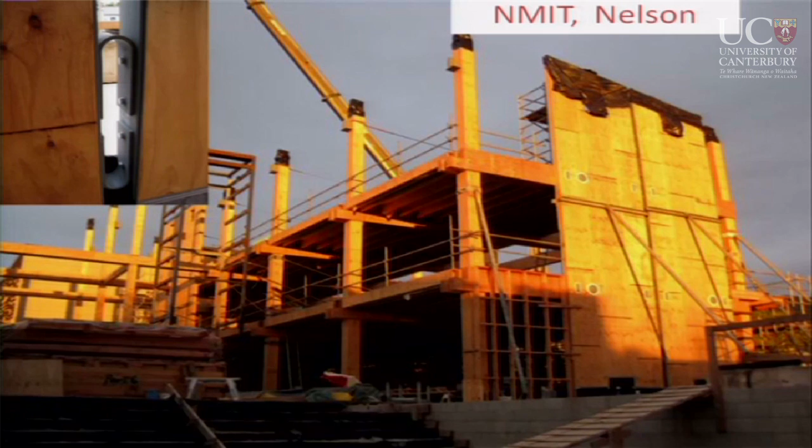This is a sort of dissipator type. Look at what the Nelson building looks like. You enter the building, and you're talking to the people living there, and the new way of doing earthquake engineering is to show the power of what you spent your money for, or what you did not spend your money on.

And the people entering there, they know exactly what they're talking about. We pretended not to be who we were, just asking, 'excuse us, we heard that this is a seismic room.' 'Oh yeah, it's a seismic room.' 'So what is the seismic stuff?' 'Oh, you see over there? Those guys are going to dissipate' - they were using that terminology - 'dissipate the energy of the earthquake.' Wow. 'And what are these doing?'

'Oh, these are tendons. They are recentering the system.' 'My gosh, what is recentering? What does it mean?' 'Oh, after the earthquake, the system will not be leaning like the leaning tower, but it's going to be straight, so no damage.' 'And what are these cables?' 'Oh, we are monitoring the building.' 'Really, you're monitoring the building? Why? What for?' 'Oh, to understand how the buildings behave during earthquakes, like a patient.'

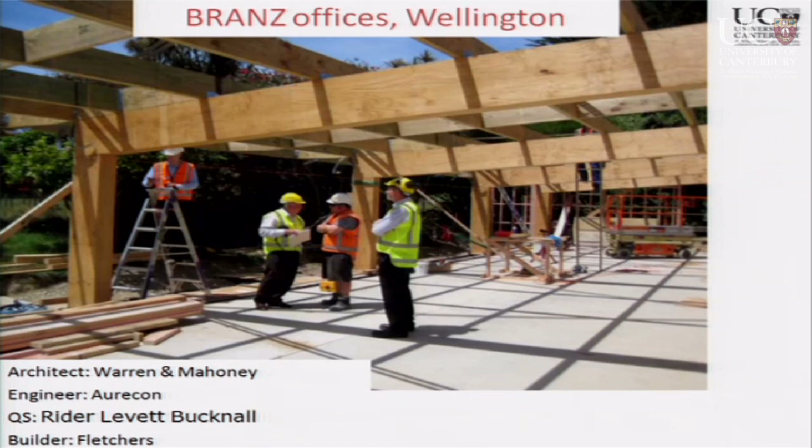That was real people spreading the word about what the new technology is, and that was absolutely fantastic as a breakthrough. Carterton Event Center - there's an event center up north using that. Office in BRANZ using the same thing.

Post-tensioning is going through - look at here how nice it could look like. You can show and not show. Massey University Wellington - you're going to see that we need something like this at University of Canterbury in the rebuild. Italy, Europe, one of the most conservative places, actually got timber for multi-story construction. Look at this beautiful rendering - it would have been all timber.

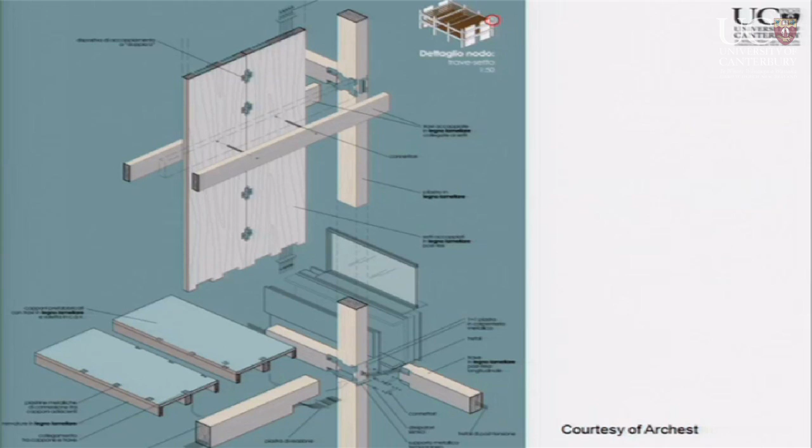Typical of Italian political situations, as you know, they're changing from right to left, to right, to center. So what happened is we basically won the competition to build an office building, and then the local council changed, and the new council said, 'thank you very much, that's your award. And the building? Oh, it's their project, the previous councillors', so obviously we don't give credit to them, you understand that. So of course we understand that, but it's awful.

Anyway, Vision 2050 - what is New Zealand going to look like in 2050? Before having the buildings you now know in town, we've been trying to look at this - this is August 2011, okay, look at the city, check around here, August 2012, looking from PwC. That's it, the good story.

Now, something is going to happen - a brand new city with new technology is going to be there. You guys are going to drive it. Don't make people choose the cheap and nasty, apparently less expensive things, which we are all going to pay for many other years. So there were a few renderings of what the town could look like with retail, offices, work - look at this, can be concrete, can be timber, can be steel, I'm going to show you.

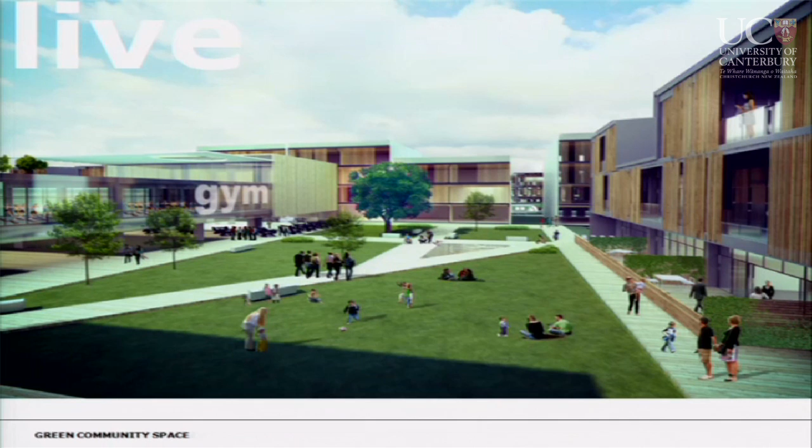And you remember that temporary housing I've been showing? The idea was, oh, actually we'd like it - green area, surrounding space, apartments, that's quite a flashy style in a way, and, but it can be done, offices.

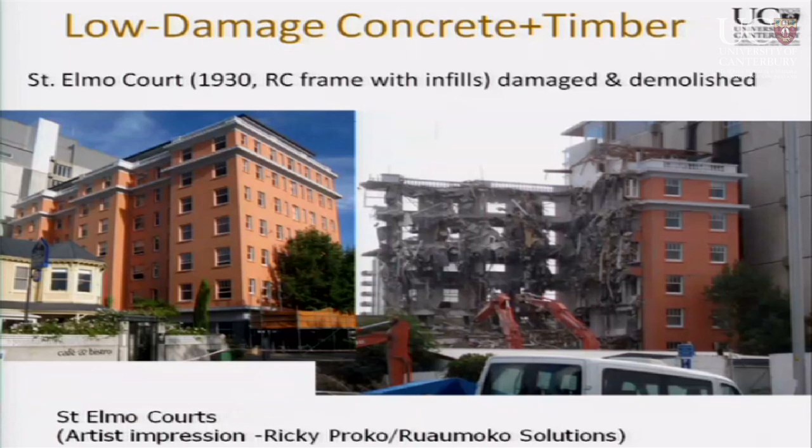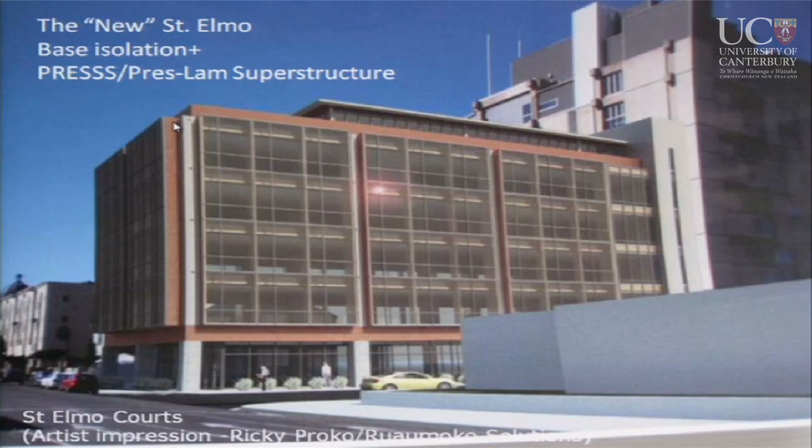And now, final five slides - concrete St Elmo becoming what? Becoming a new St Elmo, which is base isolated and rocking on top. Fantastic - the combination of the two, okay?

St Elmo is going to use concrete columns and timber post-tension beams, with base isolation. And what about the flooring system? Yes, it is concrete steel. So all the materials have been used.

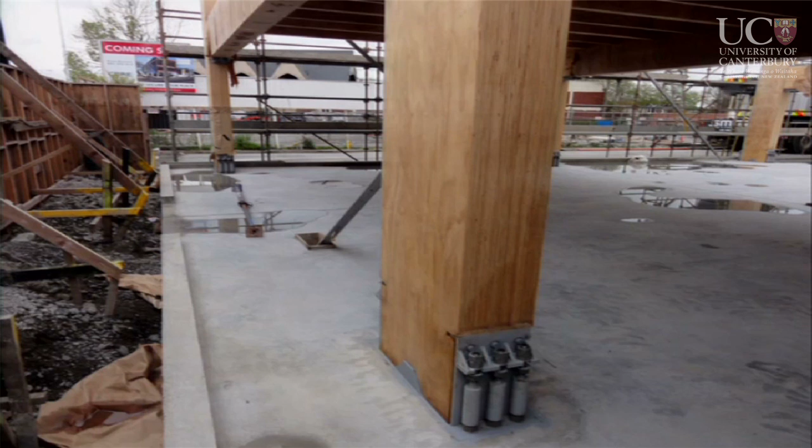Because it makes sense, Victoria Street, you might have seen it in Merritt building. That's what it looks like when you go there. There's been a humongous amount of people walking through, and these are the plug-and-play dissipators, which are going to be exposed. People can see them, they're happy, the architects, the tenants, the owner are happy to see these painted nicely within the building as a seismic resisting system.

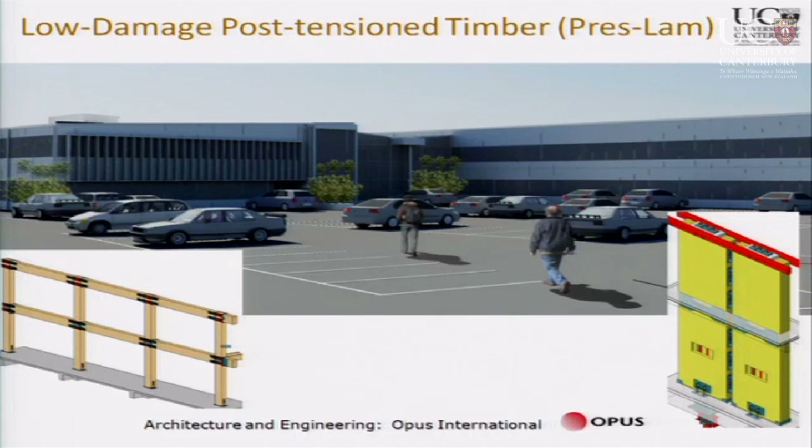Trimble, a navigation company, Mainzeal was the contractor, so you can guess it's on hold, but everything is ready to go. It's basically there waiting to be lifted up. These are frames, beams and columns already connected and then are going to be pulled up for a big building. Steel, we can do it in steel.

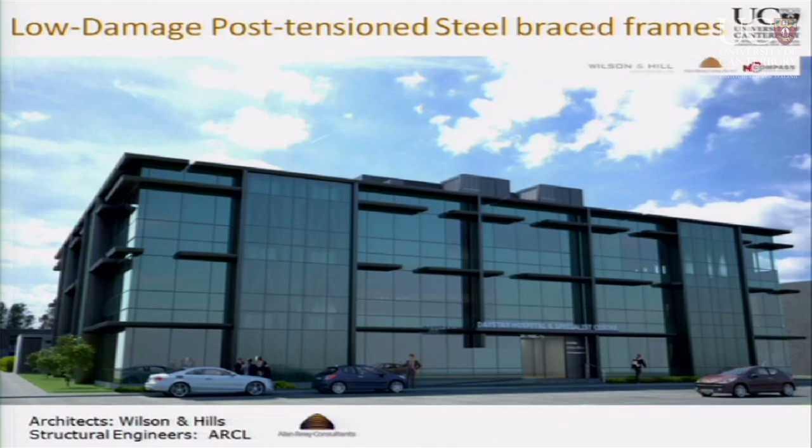We can make that rocking happening in steel. How does it look like? Think about concrete, make it timber. What would steel look like? That's it. And in fact, this is it.

Now this is a little bit fancy thing. There are viscous dampers as well as the plug-and-play combined together to get the most robust, so far possible system that we can have in mind. It was coming from a big shaking table in Japan again, e-defense. We modified it, we improved it, obviously. You never stay still.

In practice, the slide is finishing saying that you need what to make all of this happening? A willing client, or a good willing friend of the client, which is suggesting the client not to make a mistake. A design team prepared to innovate, fair enough, but it's going to be driven by bottom up. It's going to be us telling someone, don't give me the old bad way, give me the best old way, otherwise I'm not very happy about it.

Research and development are fundamental. We are testing in the lab pieces of buildings which are being designed in town. It's the best type of combination of research, which is not a smoky one, but is applied for the reconstruction of the city. We just need a bigger lab, that's another story.

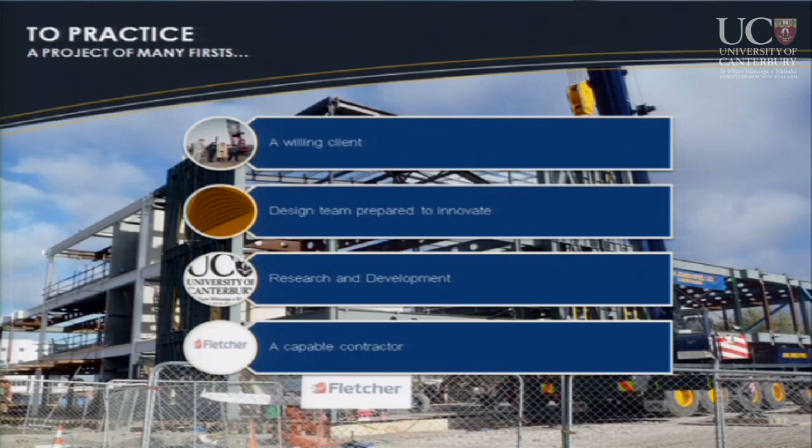A capable contractor, obviously, who's doing the construction needs to believe that it's simple, and the first time when you do things, they're not simple if you don't know what you're doing.

The slide is finishing saying that a lot of people, research victims I don't want to use that term, have been working hard in the last really few years to do all of this, and during the earthquake we received a lot of people from international missions, and all of these are people that we can leverage on. Their brain, their technology, their laboratories are basically our best friends right now.

The way to make it more formal, you might have heard, you're going to hear in a few days' time, in 2 weeks' time we're going to launch a major endeavor, which is going to try to make New Zealand up to that level where it always was, one of the best seismic countries in the world.

There are 4 schools of earthquake engineering: United States, Europe, Japan, and New Zealand. United States, California, there's a big center called Pacific Earthquake Engineering Research Center, a big consortium of research labs. The center in Pavia, my city, is now the top European school in earthquake engineering. In Japan, close to the big shaking table, there's a disaster prevention research institute.

We are now signing a memorandum of understanding with the 3 top centers in the world, and we is UCQC, University of Canterbury Quake Center, which is going to have a memorandum of understanding with the best in the world and with the best nationally, which is University of Auckland. So they're our friends in a way. They're not all the time rival.

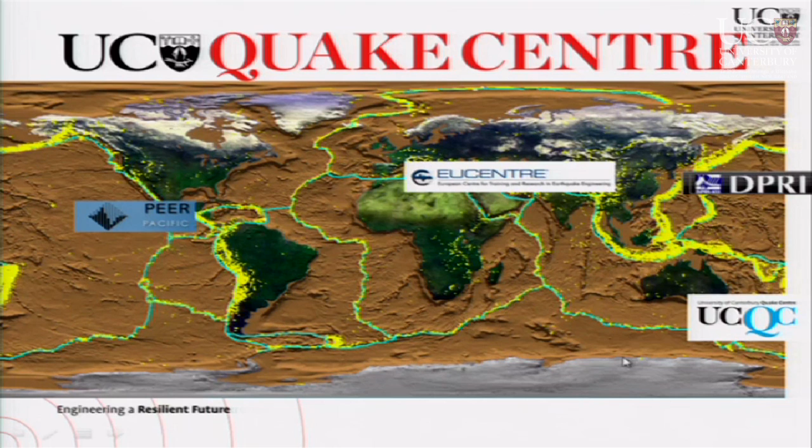We can't afford to have rivalry over here, but we are doing in a nice way what PEER Berkeley is doing, a Californian consortium, but the headquarters is in Berkeley. We want to have a national consortium with the headquarters being where it deserves to be, which is Canterbury University. Fair enough? Thank you for your patience.